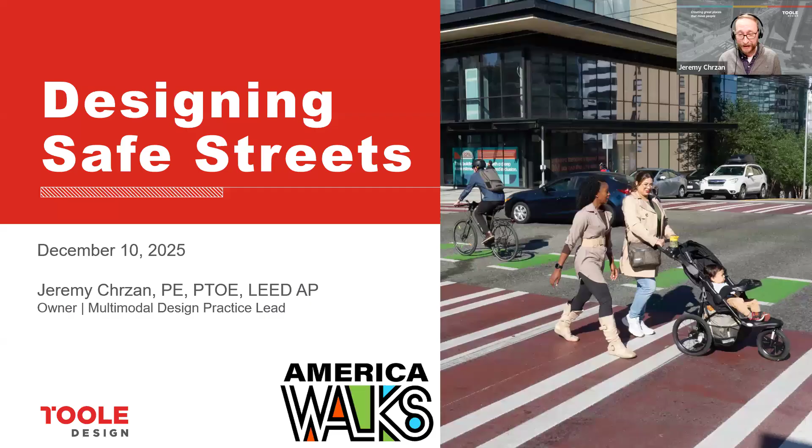In talking with the folks from America Walks, we talked about today's discussion being geared towards designers and designing for safety, but also giving you some of the tools if you're an advocate when discussing streets with your local and regional agencies. So I will say right up front, I'm going to move really quickly through a lot of slides. I'd much rather have a discussion and hear what questions you all have and give you the information that I can towards the end.

So with that, let's dig in. I've been in the transportation industry for over 25 years now, and although funding for streets and safety is actually quite high, the streets really aren't getting safe enough quickly enough. And that really shows in the numbers. Nearly 41,000 people died on our streets in 2023. Just let that sink in for a minute and then realize that millions were injured each year.

We did see some slight reductions in deaths from 2022 to 2023, both for motorists and pedestrians. But at these types of abysmal numbers, it really doesn't make it easy for the thousands of family members who lose a loved one, nor the many millions whose lives are changed due to severe injury.

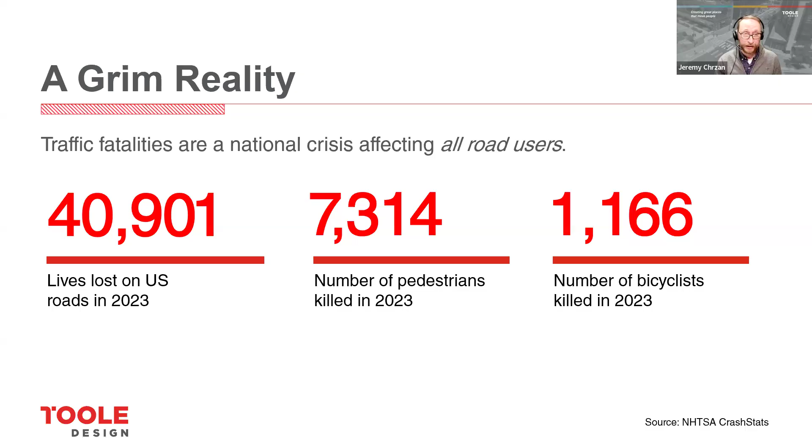And so, in looking at street design and looking at what's working and what's successful around the world, it's clear that a safe system approach to street design is what's needed to genuinely affect safety. And this means improving this culture around the idea of safety. So, from the roadway design side of things, that means safer, slower roads that prevent a person from being killed or injured if a crash does occur. But it also talks about the important parts of improving vehicles and training for everyone that's actually using our roads.

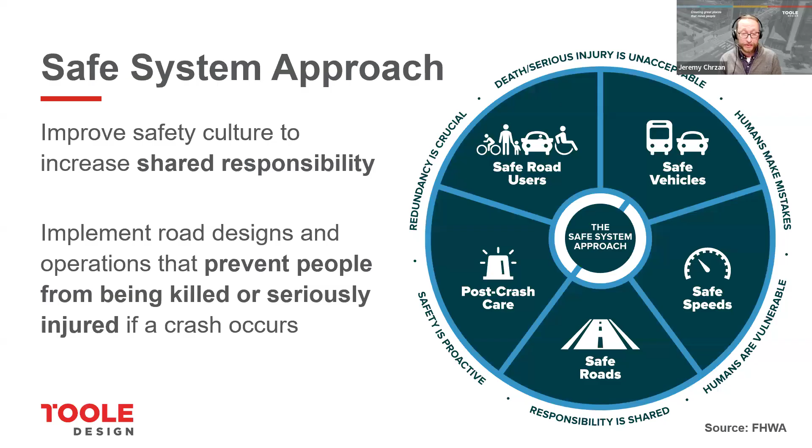Another important takeaway from the safe system approach is that safety needs to be proactive. We shouldn't be waiting to address safety after somebody dies. Yes, we should address existing high crash areas and look at our roads and identify where crashes are likely to occur. But there's lots of places where we probably have close calls and a crash just simply has not happened. And we can identify those things before something happens. So really addressing safety in a proactive way.

So why are we kind of failing at safety in the United States? As I said, vehicles and drivers is one of those things. I'll spend most of my time today talking about the roadway design piece, but I'd be remiss to not talk about the vehicles. This is an area where we've seen an increase in the size of vehicles, which means larger blind spots, more weight. So when a crash does happen, that tends to be a more severe or fatal crash.

And so what can we on the agency side of things do to affect these pieces? Well, one thing we can do is when purchasing the vehicle fleet for those agencies, the DOTs and the city fleets, we can be deliberate about the types of vehicles that we're purchasing. Beyond that, we can also influence what types of vehicles are used on our roadway construction projects.

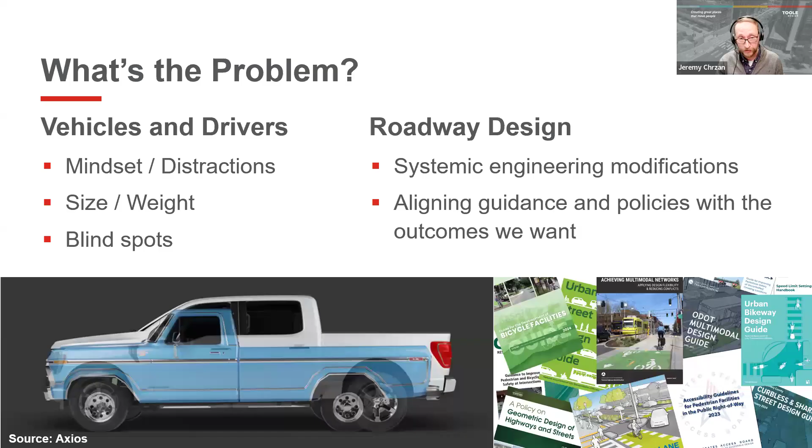So simple things like for larger vehicles, specifying that those vehicles making deliveries or being used on site have to have side guards to reduce the likelihood of a pedestrian or bicyclist being pulled under that vehicle in a collision and seriously or fatally injured. These are things that places like Boston and the surrounding communities are doing and things that can be replicated across the country. So if you're one of those people that has to prepare construction specifications or help identify city policies, you can make a difference when it comes to safer vehicles in that regard.

Moving on to design, it's typical for a designer to cite something called the AASHTO Green Book. That's something engineers use and follow for roadway designs, and is often the thing cited as why we can't do something on a project. But in reality, the AASHTO suite of design guides gives us a lot of design flexibility to tailor a street design to meet our established project goals.

The Green Book is explicit in stating that good highway design involves balancing safety, mobility, and the preservation of scenic, aesthetic, historic, cultural, and environmental resources, and reinforces that sufficient flexibility is permitted to encourage independent designs tailored to the particular situation. Too many engineers use this guide as a detailed manual of standards, even though it explicitly says not to do that. So that's one important thing that we can be doing.

Things discussed in that guide are also open to a lot of interpretation. One of the things that could have a significant effect on safety is the width of our lanes, that many lanes have historically been built in that 11 to 14 foot wide range. Even the old AASHTO bike guides encouraged 14-foot wide lanes with the understanding that it would be more beneficial for vehicular cyclists. That doesn't actually pan out when you look at the research, though, and historically we can identify that narrower lanes tend to actually be safer.

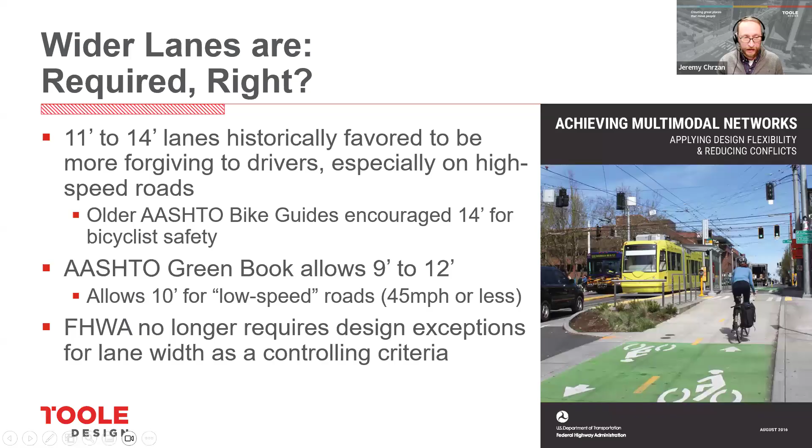It also used to be that you had to jump through a lot more hurdles if you were proposing narrower lanes. But many years ago, FHWA did away with the requirement for a design exception for lanes that didn't meet certain criteria. So we actually do have a lot more flexibility to narrow those lanes, and they're not required to accommodate the widths of vehicles that, by and large, are 7 to 8, 8.5 feet wide for the widest.

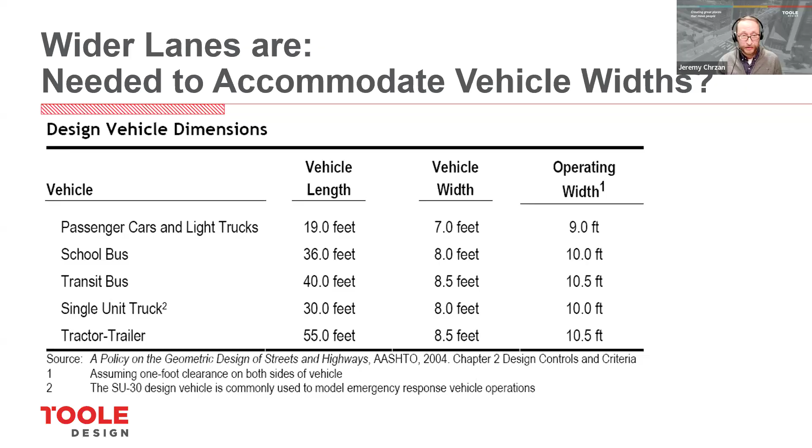And so when you look in the AASHTO Green Book, it talks about the operating width really only needing to be 9 and 10 feet wide. There's plenty of examples around the country where 9, 9.5, 10-foot lanes are used even with heavy transit use. And when we can narrow the widths of lanes, that contributes to lower operating speeds on those vehicles. That's what we know over and over again, that if we can lower the speeds of motor vehicles, we can reduce the severity of crashes if and when they do occur.

And so in FHWA's Achieving Multimodal Networks Guide, we said explicitly that narrow lanes can contribute to lower speeds when they're integrated as part of an urban street design. So it's not just the narrow lanes, it's the other things, but it all adds up to a safer street.

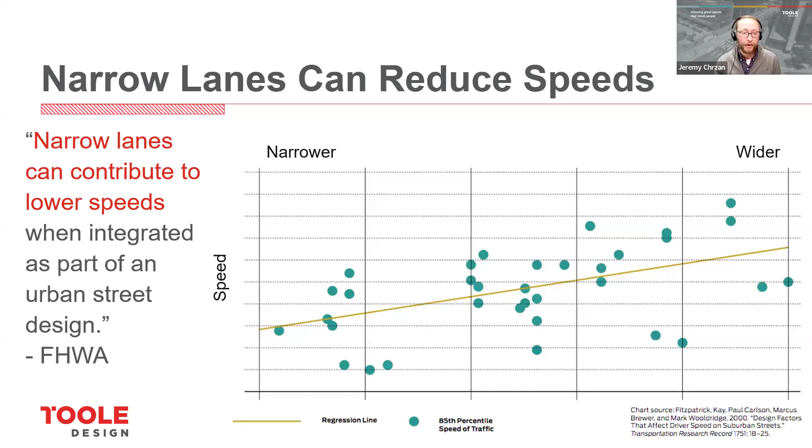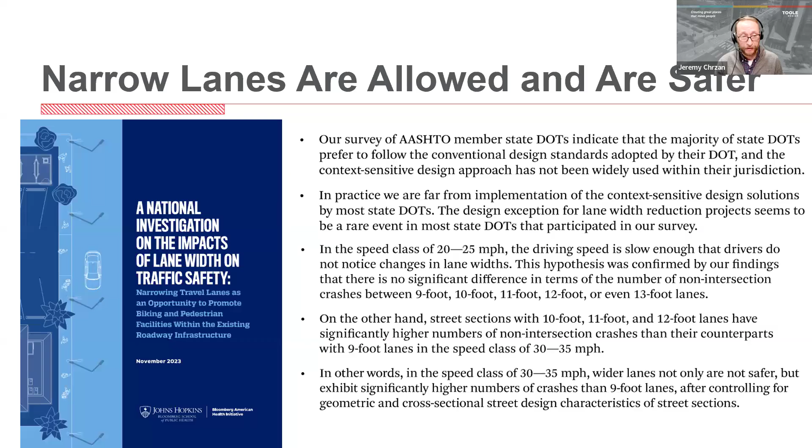One of the reasons that's often cited as a need for wider lanes is for transit or large vehicle operations. But sometimes that information is being taken out of context. Why do we actually need 11 feet to accommodate those wider vehicles? Well, the reason is to try to avoid things like mirror strikes.

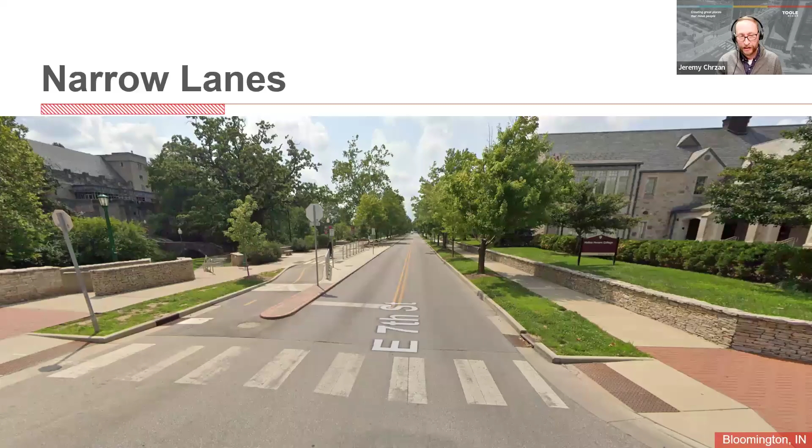But in this situation, on the left-hand side of the road, you can see transit stops there, but there's also a separated bike lane there. So there's a buffer that mirrors can overhang over without striking anything. We don't actually need the 11 feet of paved width, we just need 11 feet of space that isn't going to have obstruction. So really thinking about what was the intent of design guidance can really affect the safety outcomes.

This is another location I drive through all the time. It's East-West Highway in Prince George's County. This is a location where it goes over Sligo Creek, and even though it's an SHA road, it narrows down to narrower lanes, and in this case, 9 feet on the right-hand side.

And I can tell you, having driven through here, every time you go through here, you tend to slow down because it is a little less comfortable to drive quickly. And so it does get some of that driver behavior.

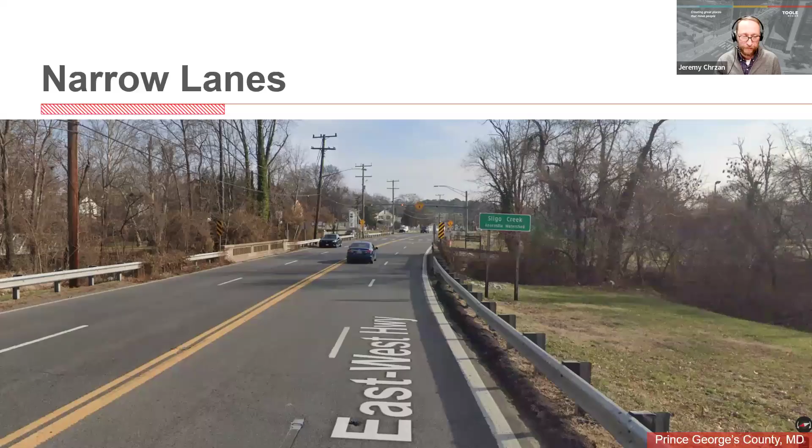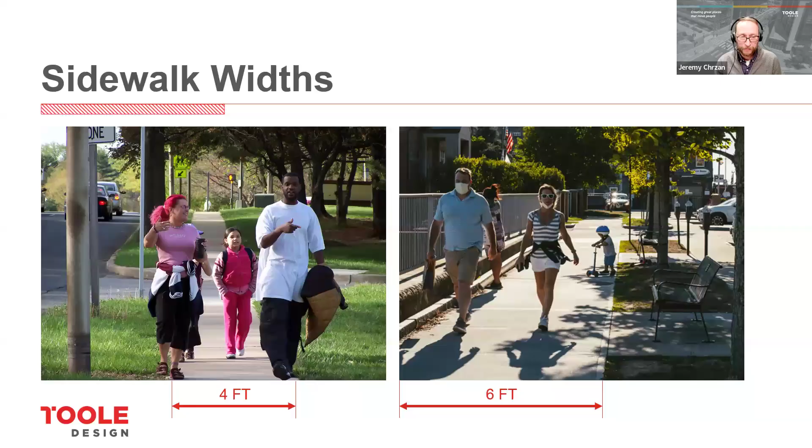Sidewalk widths is also another thing that I think gets overlooked in terms of street safety. Oftentimes, agencies are doing the bare minimum, 4 foot wide with 5 foot passing areas to meet the accessibility criteria. But when we provide 6 feet, it's going to create an environment where people can comfortably walk next to each other. When we have sidewalks right up against the curb, it means people aren't hanging out over the edge of the roadway. And it also makes it safer for children like the one on the right-hand side to be in that space without a safety concern.

As a person with a 7-month-old puppy, I can tell you that my dog is skittish when he hears a truck or a bus. And so I have to deliberately avoid some of the streets in my neighborhood because they're right up against the edge of the curb line and very narrow. The same thing holds true for somebody who's walking with a small child. The widths can inform how safe and comfortable that is.

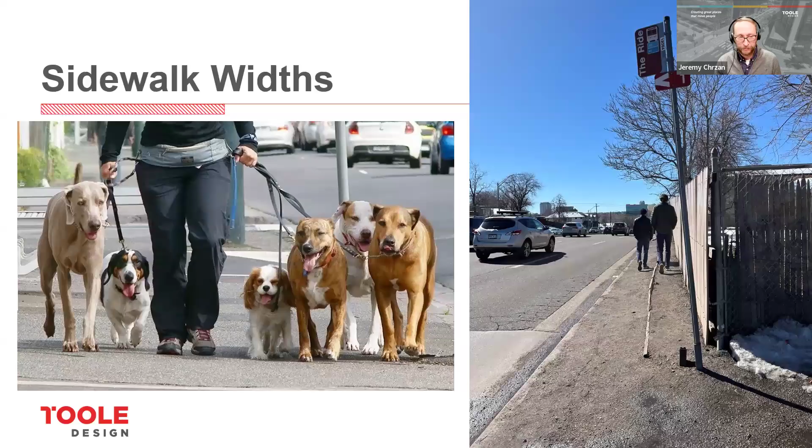Similarly, access to transit, like the photo on the right, the access board does require that accessible routes be provided that connect to transit stops. But beyond that, we also know that we need 8 feet of space to board and alight passengers on a bus. Providing that space also means somebody isn't standing in the middle of the sidewalk and blocking people trying to walk past, avoiding them having to step down into the road to get around people using that space.

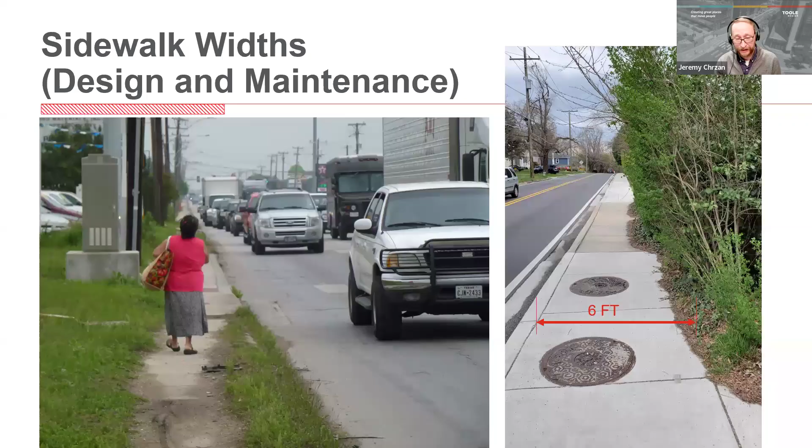And beyond that, maintenance and things like that also are really going to affect safety. Even when you have 6 feet of width, if that's not properly maintained, it's really not going to be safe or comfortable, and people will tend to avoid that location, or if they can't, they end up being put in more compromised situations.

And I'll note that Federal Highway, even back into the early 2000s, was already saying that the desirable width for a sidewalk is often much greater than what's required. In shopping districts, it can require 12, 20, 30, and even 40 feet of width to handle the volumes of pedestrian traffic that they encounter. And it's stated explicitly that sidewalk widths have not been given sufficient attention by most designers.

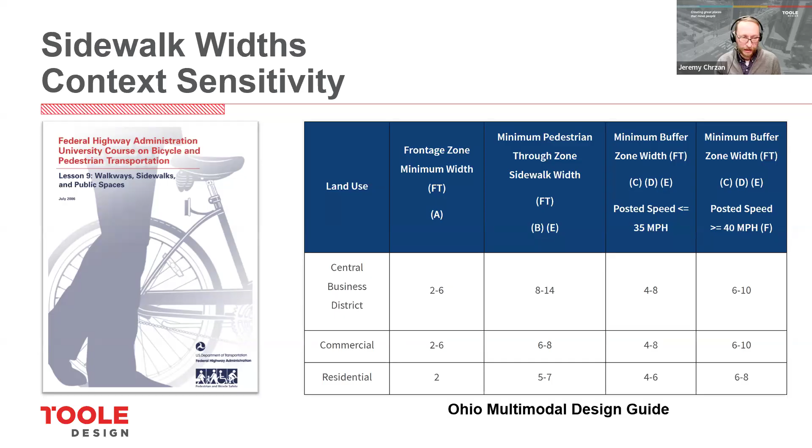So as we were developing the Ohio Multimodal Design Guide, we were looking at not only what are the appropriate starting point widths for a sidewalk based on context, but also what are the appropriate widths of the buffers along those sidewalks to make them more safe and comfortable.

Another thing that's important from a safety perspective is developing public spaces in a more inviting way. The inclusion of things like street furniture, landscaping, and pedestrian scale lighting can make a big difference in making a street more inviting, increasing that pedestrian activity.

When you have that pedestrian activity, drivers are more aware of the fact that they're going to encounter pedestrians on the street. It's that safety in numbers principle that can be applied by making a street more inviting.

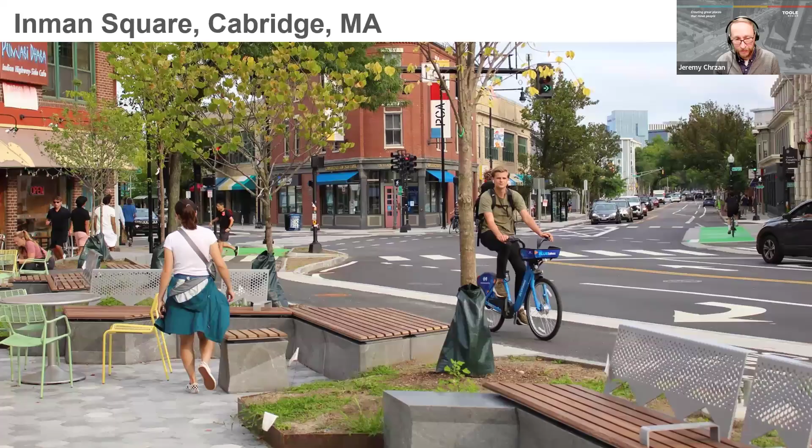This is Inman Square in Cambridge, Mass. This was able to create a space as part of a street reconfiguration that also affected the safety of the street users. Shared use path width, similar to sidewalk width, really needs to be thought through when it comes to the safety of those users on those paths.

Historically, we've been doing shared use paths at the bare minimum 10 feet wide, when at least 11 feet is really needed to accommodate somebody riding side by side and people passing. We know that people flock to these locations to get exercise and socialize. What tends to happen is we build at the bare minimum and get photos like the bottom right, where it's so congested it almost becomes unusable by the wide range of users going at different speeds and volumes. So what the AASHTO Bike Guide points out is that we need to be selecting values for these widths based on the anticipated use.

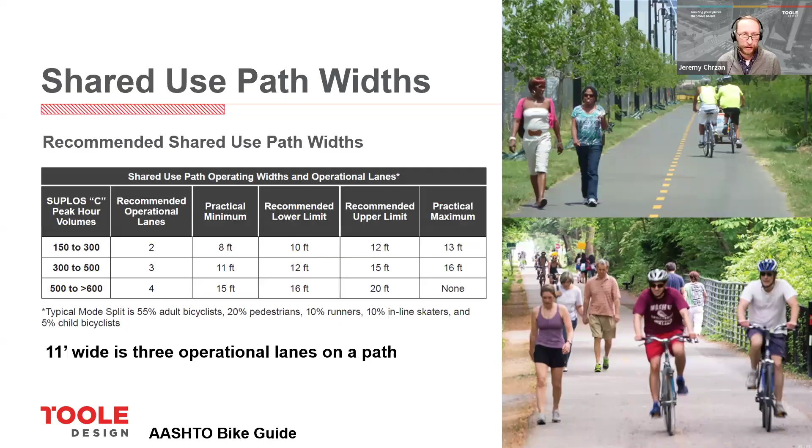Here's an example from Columbus, Ohio, where the widths are clearly wider than what we saw in some of those other photos. It allows people to bike side by side, and would also allow pedestrians to walk side by side, creating a more inviting, comfortable, and safer environment. I also want to point out the importance of shy distances from things along a path. Here, both the guardrail and the railing along the side are offset from the path to make it truly functional.

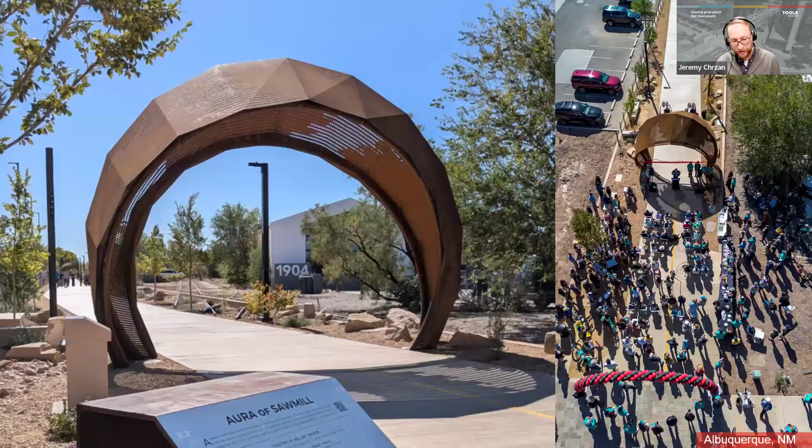Here's another example from Albuquerque, New Mexico, on the Albuquerque Rail Trail. This is a brand new trail, and the default starting width was 14 feet to accommodate that diverse group and variety of different types of users. I'll also note that projects like this that incorporate public art components and latch onto the history of the corridor can help make it more inviting. Pro tip: if you visit Albuquerque and go to this trail, these amazing sculptures over the path each cast a different type of shadow on the path, so look out for that.

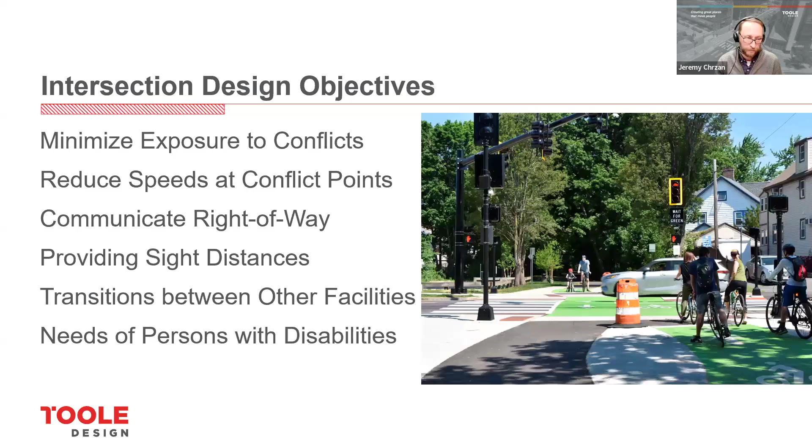Next, let's focus on intersection safety. When we were developing the bike guide, we flagged six things that we need to be doing at intersections, applicable to both pedestrians and bicyclists from a safety perspective: minimizing exposure, reducing the speeds of vehicles at conflict points, communicating who has the right of way, making sure everybody can see one another, and making sure transitions between facilities are intuitive and that the needs of people with disabilities are being addressed.

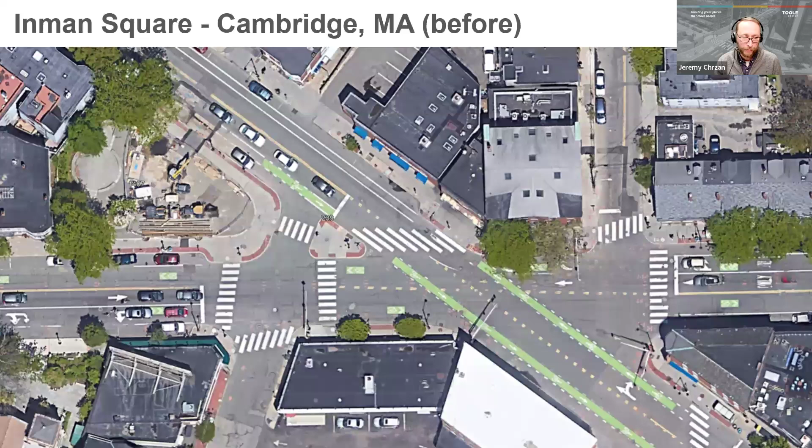Here's what that street looks like today. You can see that plaza I talked about before in the upper left. We were able to repurpose a lot of public space and focus the design on safety, making it more intuitive and reducing those pedestrian crossing distances, and where we had to, relying on things like signalization to separate motor vehicles from pedestrian and bicyclist traffic.

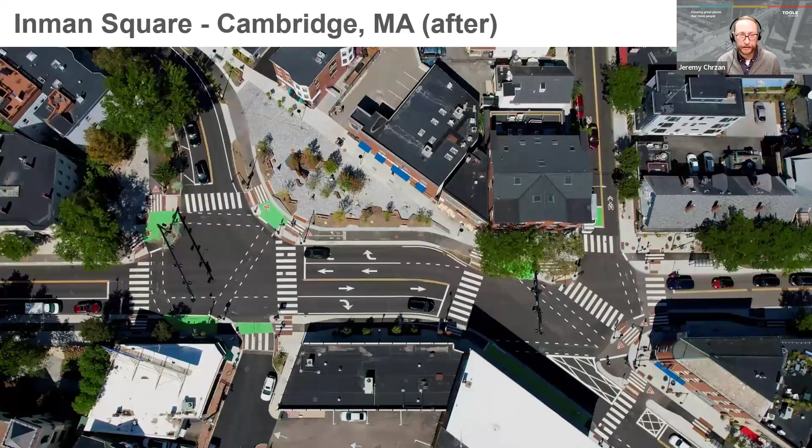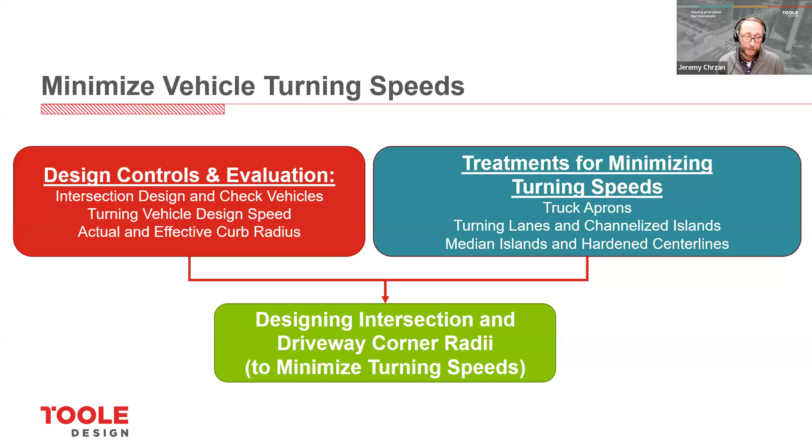When we talk about minimizing vehicle speeds, that's really important on our streets. We need to focus on what vehicles we actually need to use as our design vehicle, and what vehicles we simply have to accommodate, then alter the design to meet those needs. One important thing to recognize is that when you construct a corner at an intersection, the constructed radius is not always the path that the motor vehicle actually takes.

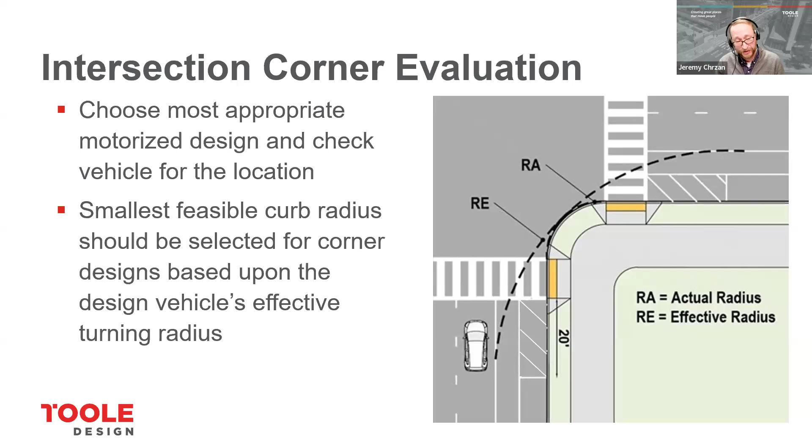More often than not, like the photo on the right here, the effective turning radius, which is what's going to control the speed, is often much larger than the constructed radius. So curb extensions can help with that, and protected intersections can further help with that. We'll talk about that in a minute.

But first, what are the appropriate vehicles that we need to be accommodating on those streets? Too often, I'm told on a project that we have to accommodate the large tractor trailer at each one of these intersections. Is that actually true? Is that the vehicle that's frequently making that maneuver, or is it something that's really only occasionally happening and really doesn't need to be the design vehicle for that location?

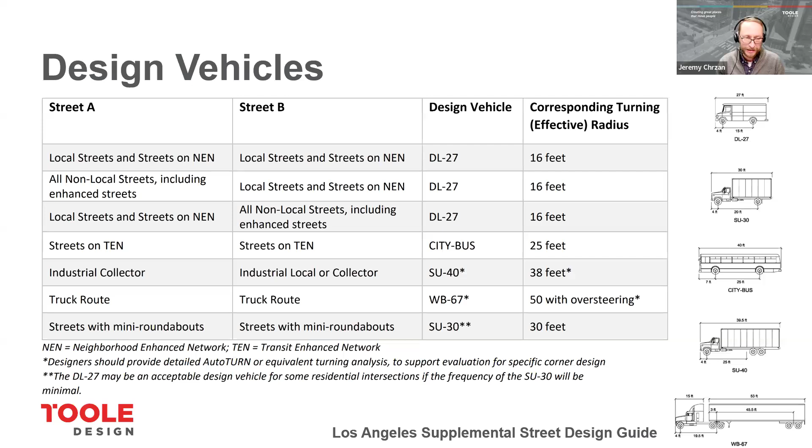The Los Angeles Supplemental Street Design Guide is a good example of highlighting that if it's local streets, it's by and large the Amazon truck or the FedEx truck. Those are the most frequent larger vehicles using those streets. Yes, we still need to accommodate the trash truck once a week and those occasional large vehicles, but as long as we have the pavement for that to work, it'd be much better to design it for those smaller vehicles as the default user.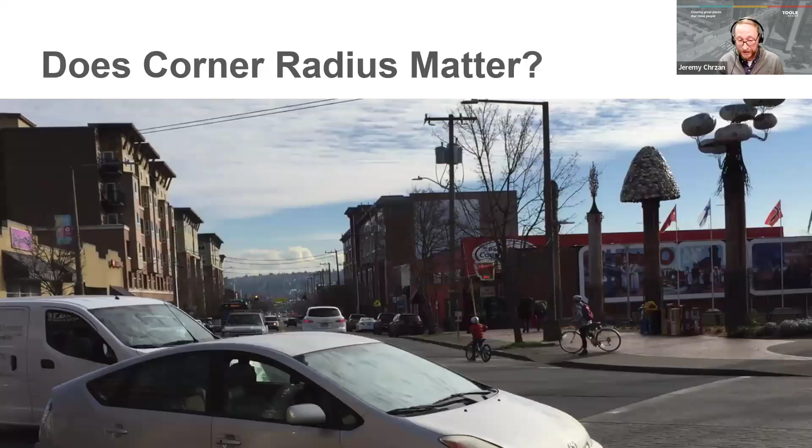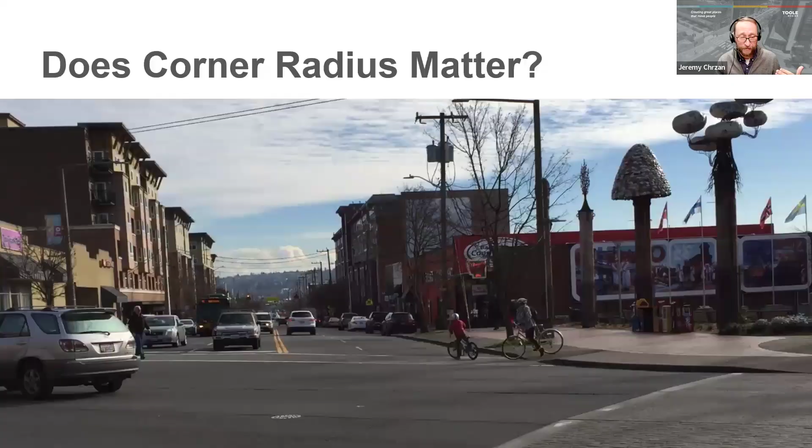Does the corner radius actually matter? I could tell you this mother and her child, it very much mattered. This is a location that has a large constructed radius, and because we have two receiving lanes on that intersecting street, that white vehicle was able to make that turn quite quickly. Everybody can see that the conflict is happening, but the vehicle's traveling too fast to be able to react.

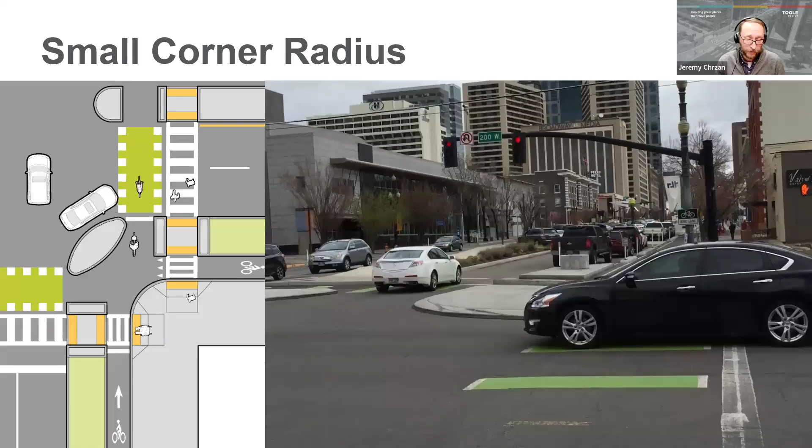By comparison, an intersection that's designed with a small corner radius forces a turning vehicle to make that turn more slowly. These are effective strategies at addressing safety and should be deployed more frequently on each and every one of our intersections. And it doesn't have to always be in concrete.

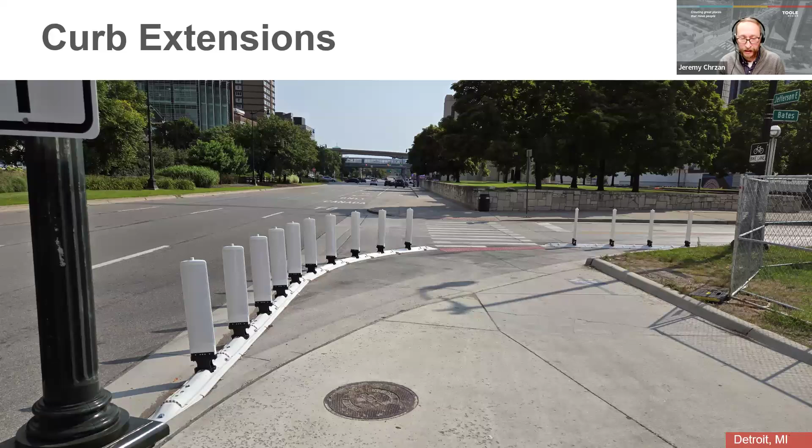We can retrofit our streets to meet these needs today. This is a good example from Detroit, Michigan that I encountered, where a sort of quick build curb extension was used to tighten up that location and force drivers to make that turn a little more slowly.

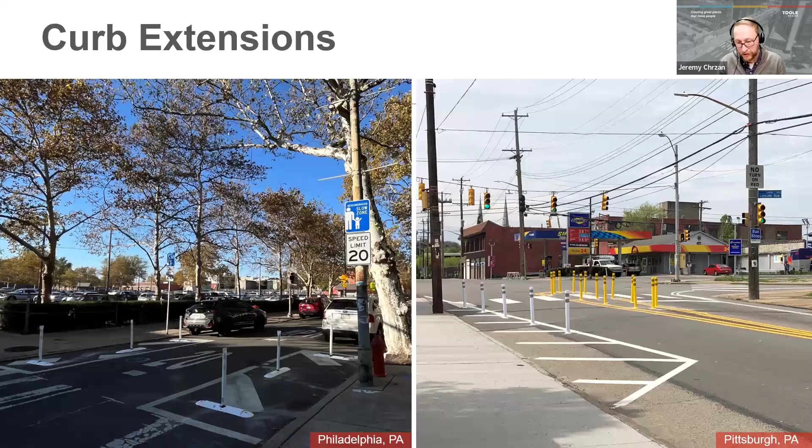We're seeing this across the country. The Philadelphia Slow Zones Initiative is using bump out curb extensions to alter the corner radii. Here in Pittsburgh, that was another example of not only doing some lane narrowing and some corner changes, but also doing some chicaning to affect motor vehicle speeds on those corridors.

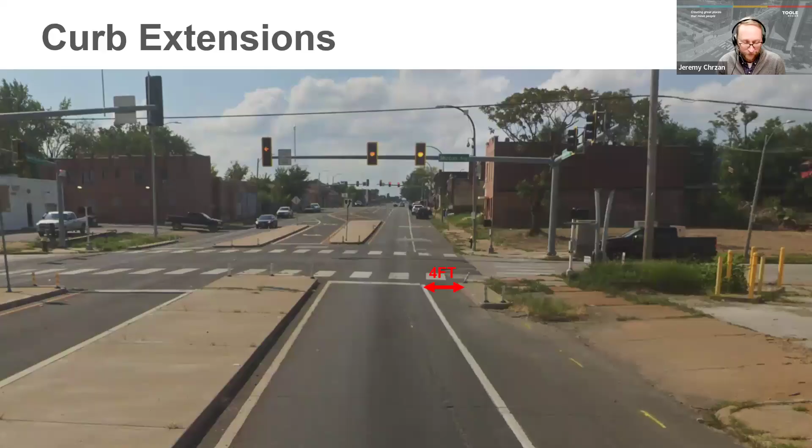But not all curb extensions are built alike. In this example here that I recently encountered, there was a safety project that was done. They installed lots of concrete in the middle of the street, but the curb extension on the right there has a 4-foot offset from the adjacent travel lane. It's minimally effective at addressing turning vehicle speeds and doesn't provide the benefits of things like shorter crossing distances for pedestrians. So it's not affecting the pedestrian exposure or the turning vehicles.

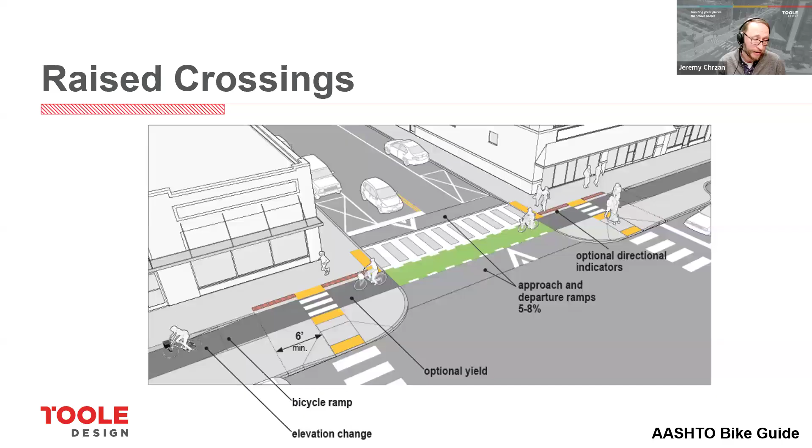Raised crossings are another one of those treatments that can control vehicle speeds. We can deploy these things not just at intersections, but also at driveways to further reinforce that the crossing users have the priority while still accommodating the motor vehicles at those locations.

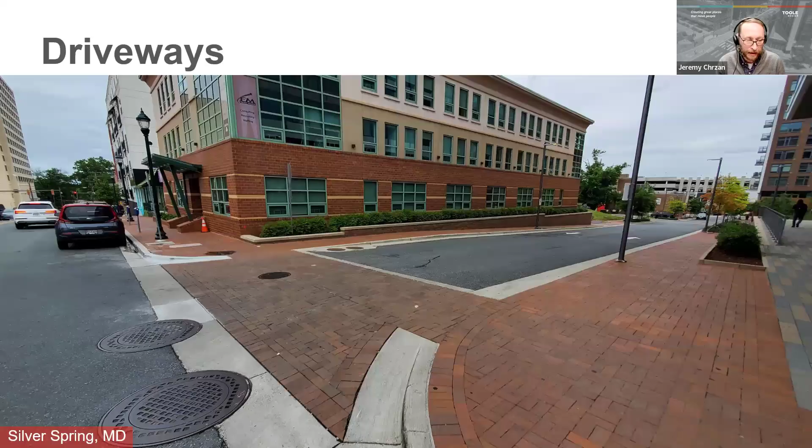Here's an example from Silver Spring, Maryland, where you can see the priority is maintaining the pedestrian traffic while still accommodating the vehicles turning there.

And we're not seeing vehicles bottoming out with these types of designs because we're incrementally stepping up that elevation. So really it comes back to altering the design guidance to a design that actually works and has been tested like this.

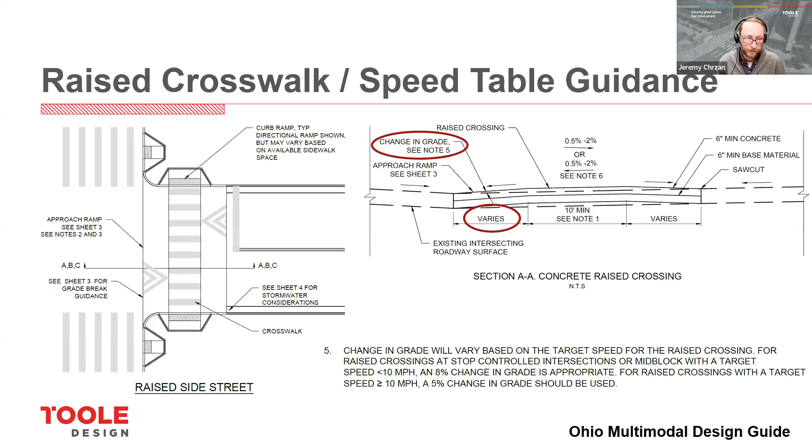Another example from the Ohio Multimodal Design Guide is their detail for raised crossings and speed tables, which drives home a point that past traffic calming guidance missed. It always said that the ramp up and ramp down on these treatments needed to be 6 feet long, but that just means a static change in grade. What we highlighted in the multimodal design guide was that you should alter the length of that ramp and the change in grade based on what speed you want drivers to navigate it at.

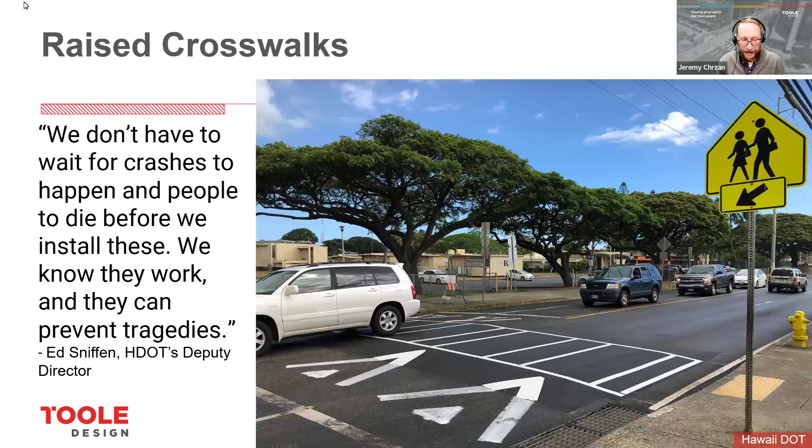We're seeing lots of agencies doing this as a default policy now. The state of Hawaii is doing tons of raised crossings to address safety. As they said, they don't have to wait for crashes to happen, because they know this is a strategy that works, so they're deploying them regularly.

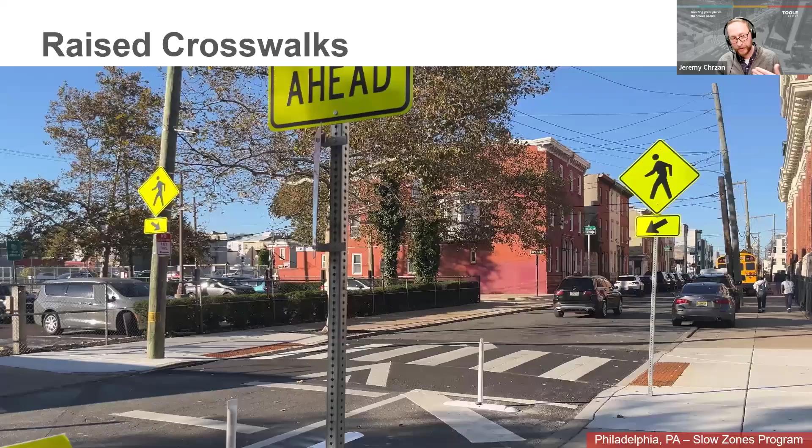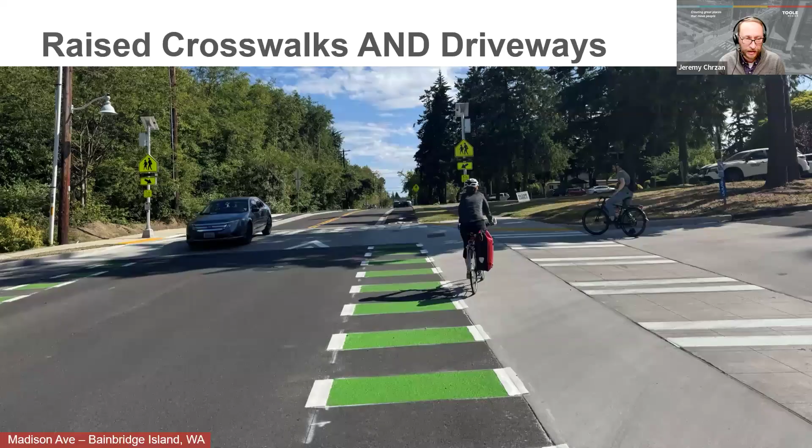Here's another example from the Philadelphia Slow Zones program. As you build these, it really empowers the agencies to know these are things they can do and that they work. Here's another example from Bainbridge Island, Washington, which includes both a raised crossing across the main road and a raised crossing across the adjacent driveway. This is important because in this context, it's next to an elementary school and a middle school, and also serves as a connection to the Sound to Olympics Trail as well as some park trails. So this is a location with vulnerable road users, and installing infrastructure to address that is part of the conversation.

While there are lots of tools we can use to affect driver behavior and speed, like curb extensions, medians, and pedestrian refuges, the one I find most compelling is probably mountable truck aprons. Anytime I'm doing an intersection corner that's more than 15 or 18-foot radius, I want to see a mountable truck apron to control those turning vehicle speeds.

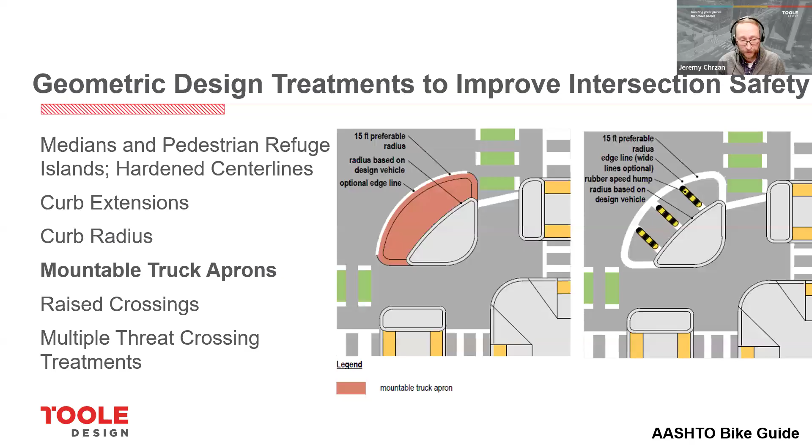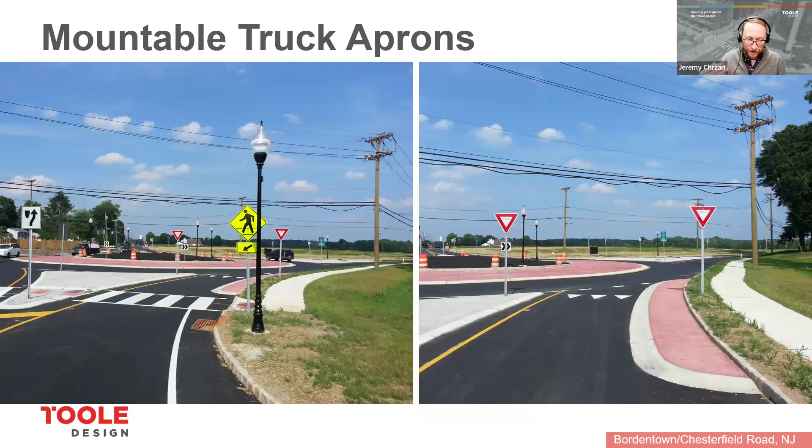The first roundabout I ever worked on was this one in Bordentown, Chesterfield Road in New Jersey, implemented as part of a safety project. Even though we had to accommodate larger vehicles, we incorporated mountable aprons on the approaches to these roundabouts to control entering vehicular speeds. Note also the picture on the left - that mountable apron is only included on the downstream side past the crosswalk, because we deliberately didn't want to confuse pedestrians into thinking the area in line with the apron was a safe place to wait. So some designs you'll see it upstream of the crosswalk, others downstream - it just matters where it's going to be most effective at controlling speeds.

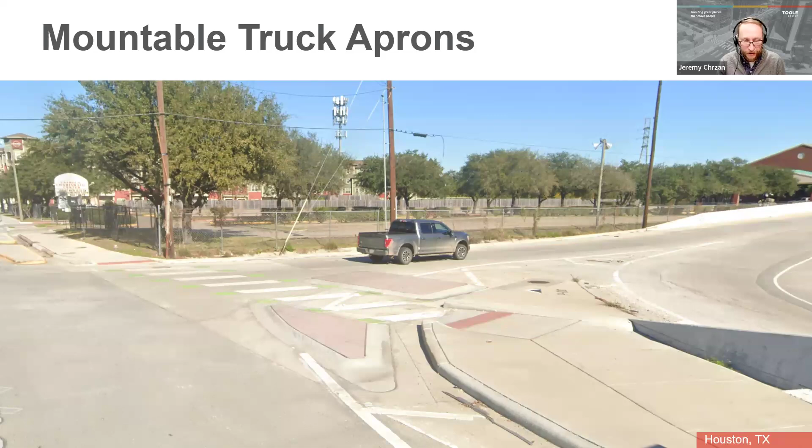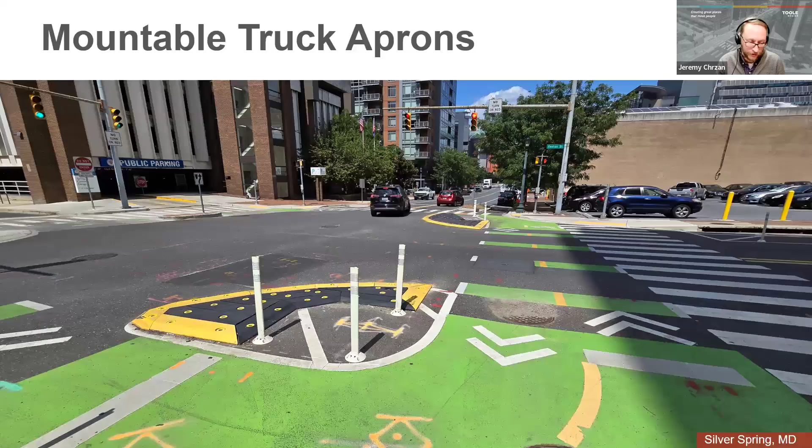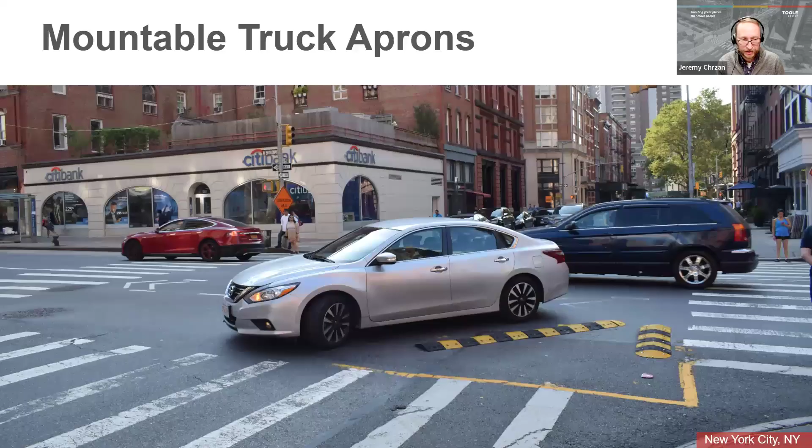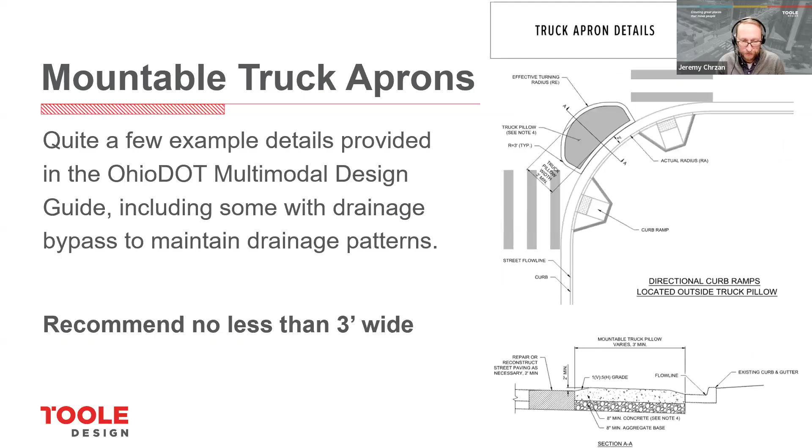There's a lot of good construction details - if your agency doesn't have them, we included those in the Ohio Multimodal Design Guide, showing this configuration as well as the one we referred to as a truck pillow.

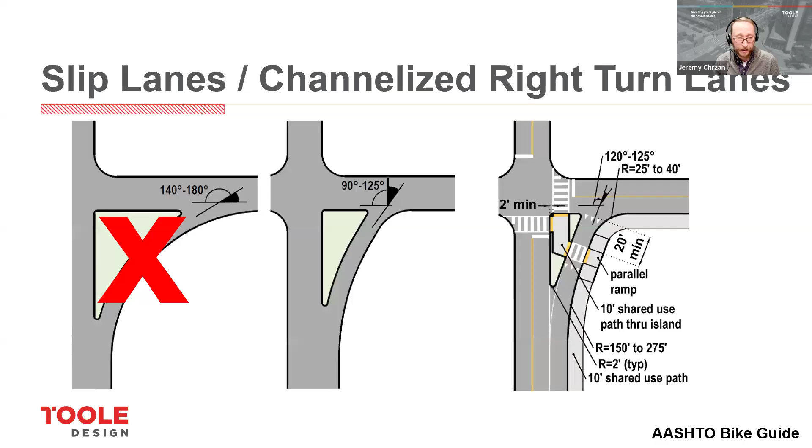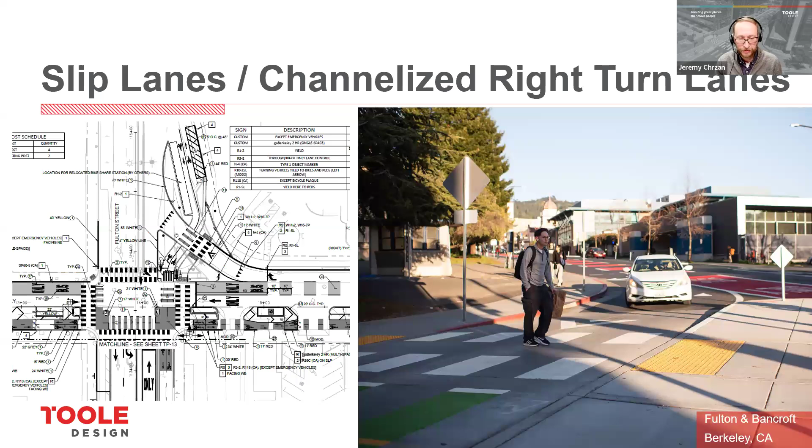So the Fulton and Bancroft intersection in the Berkeley, California project included that type of geometry, and it includes both pedestrian and bicyclist crossings of those slip lanes.

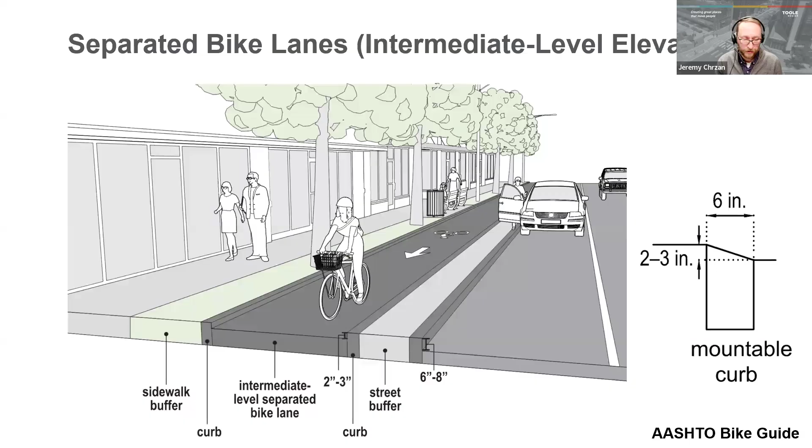Intermediate level separated bike lanes are also a great tool for addressing safety, as well as pedestrian accessibility. If we include a small mountable curb between the bikeway and the adjacent sidewalk, it can really help reinforce the difference between those two facilities and not encourage pedestrians to walk into those locations. Austin, Texas is deploying those regularly. These intermediate level designs also make it pretty easy to do grading at things like floating bus stops, making that transit accommodation a little better for pedestrians.

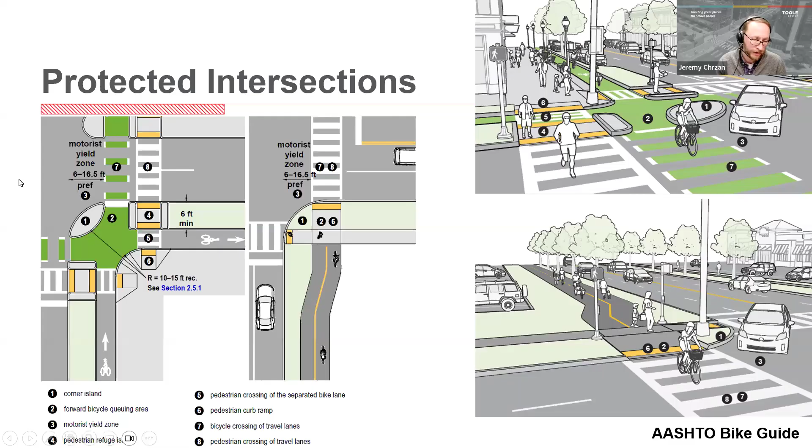Protected intersections are a clear concept that works well not just for separated bike lanes, but also shared use paths along roadways. The key features are the corner island that slows the turning vehicle and having an offset from the adjacent roadway. Research has shown that an offset of 6 to 16 and a half feet from the adjacent roadway is more likely to get that motorist yielding.

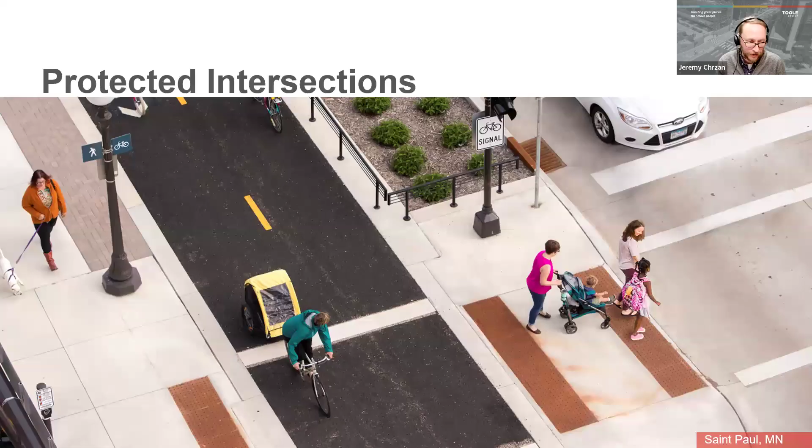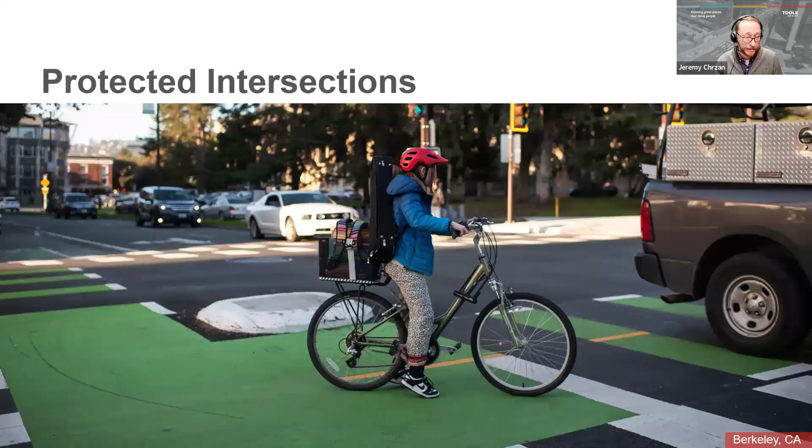The first one I ever worked on was St. Paul, Minnesota, but there have been plenty constructed around the country. Here's another one from Berkeley, California. The Berkeley project included a protected intersection. You can see here it's not even a very large corner island that's needed, but it is effective at controlling the speeds.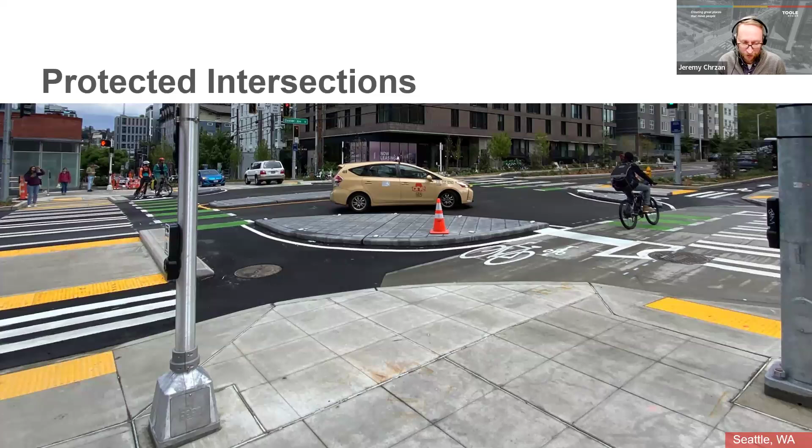Seattle, Washington has quite a few of the really good designs for protected intersections. Here it's even doing a center median in the middle of the road to really narrow the roadway widths and make the vehicular turning paths more predictable.

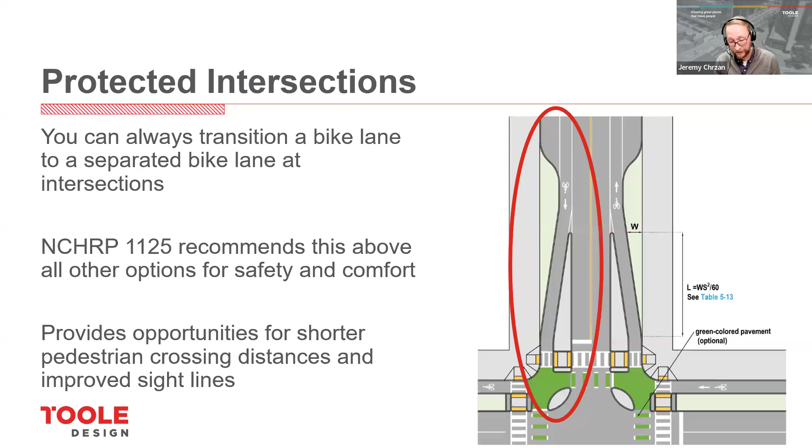You don't just need to do this if you have a separated bike lane. You can convert conventional bike lanes to a separated bike lane at an intersection, and that's actually the preferred recommendation from NCHRP 1125, highlighting that that's the preferred design for both safety and comfort.

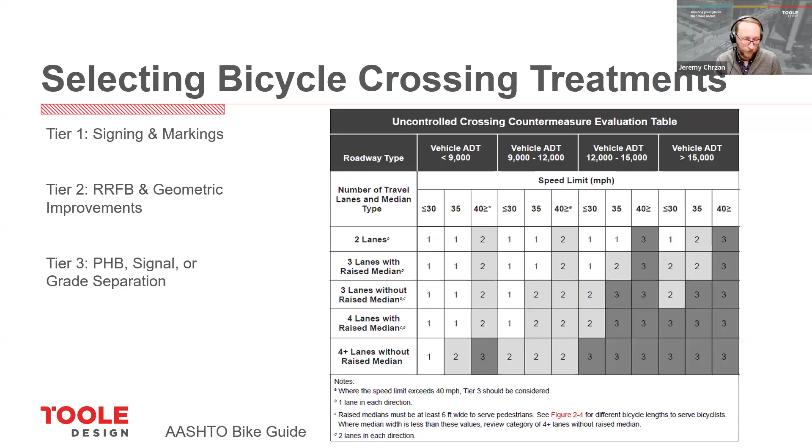Obviously, we have the FHWA STEP guide to identify what countermeasures work well for a mid-block crossing, and you'll see similar guidance in the AASHTO bike guide, focusing on markings, rapid flashing beacons, pedestrian hybrid beacons, and signalization.

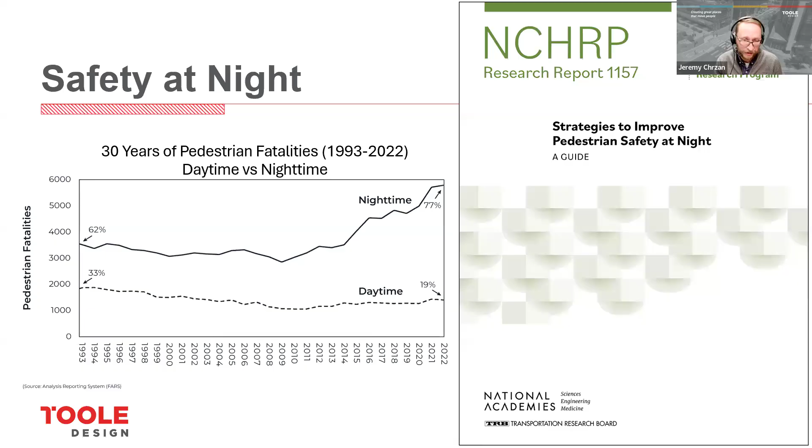Safety at night needs to be a major focus of our infrastructure investment because nighttime crashes are where we're seeing the greatest number of pedestrian fatalities. That was highlighted in the recently released NCHRP 1157. That study identified that the key to addressing safety at night is reducing vehicular speeds, enhancing visibility, and reducing a pedestrian's exposure within the roadway.

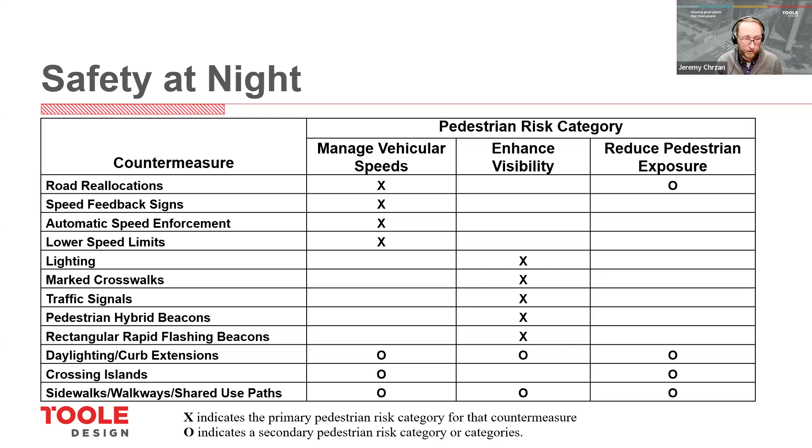So what are the countermeasures that work well for that? The top ones are reallocation, speed limit setting, and enforcement, because that's what's going to ultimately affect vehicular speeds. Yes, lighting and other treatments are still part of the equation, but we have to alter the speeds to really get those safety benefits.

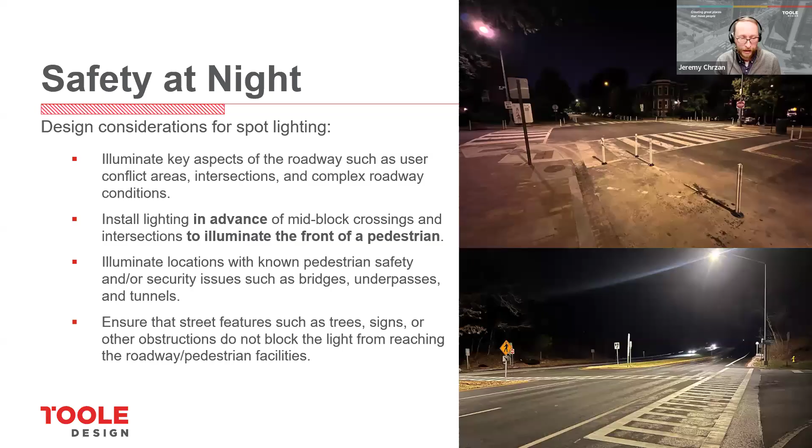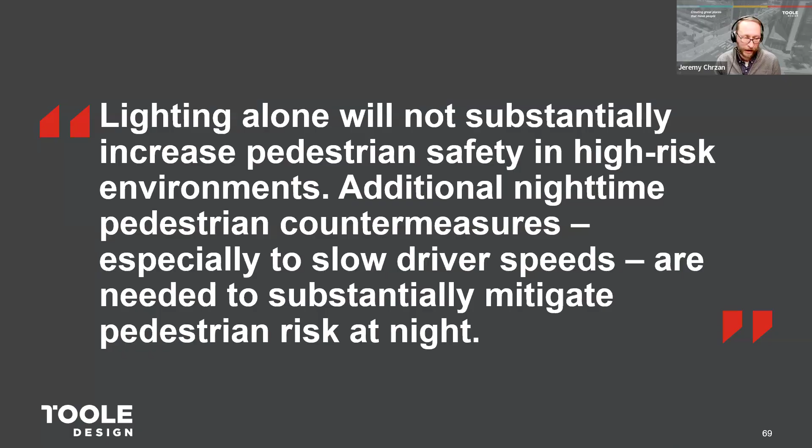When it comes to lighting, specifically located spotlighting—particularly locating them in advance of a crossing so a pedestrian is front illuminated—is most likely to be the most successful. But the study was very clear: lighting alone will not increase pedestrian safety substantially. Instead, we need to alter the speeds of vehicles to have a significant impact on pedestrian safety at night.

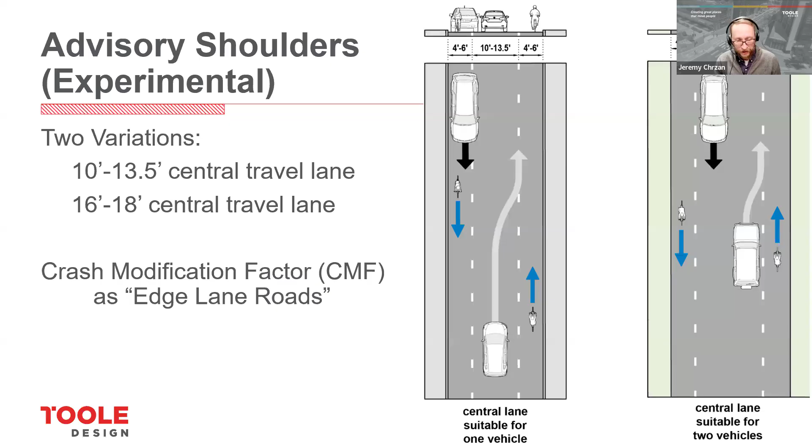Closing out here, I don't want to miss rural areas and rural safety for pedestrians. One treatment that's quite interesting is advisory shoulders. They are technically experimental, so you need a request to experiment from Federal Highway if deploying them. But that said, they do have a crash modification factor and have been shown to better address safety on those types of roadways. You can look that up under the title Edge Lane Roads.

And again, these aren't pie in the sky ideas. They are being implemented around the country. This is an example from Maine as well as New Hampshire.

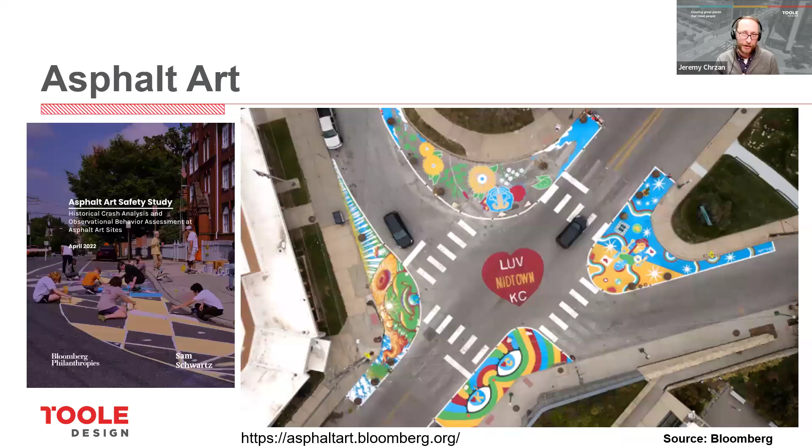I'll close out with something that's a little less physical in nature. Despite what you may have heard, aesthetic surface treatments are still permitted by the Manual on Uniform Traffic Control Devices. In situations like what's shown here, those areas outside of the edge lines aren't actually part of the street anymore—they're part of the sidewalk. So we have a lot of flexibility we can deploy there.

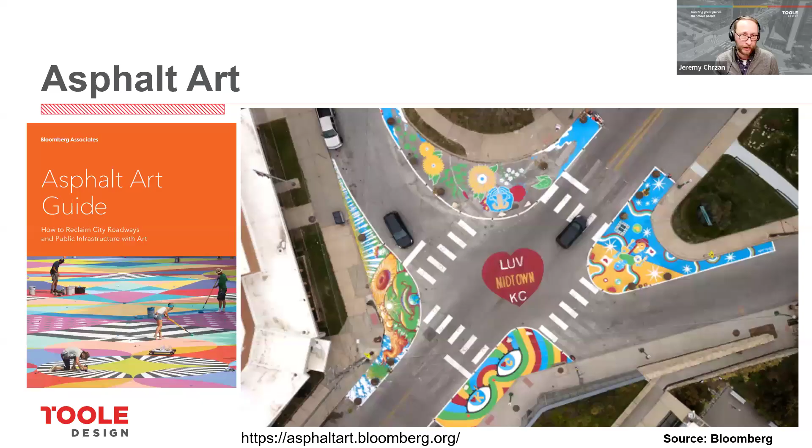The Bloomberg study that was done in 2022 looked at both crash statistics as well as user behavior, and found that these types of treatments can have a benefit in reducing crashes and improving motorist yield rates.

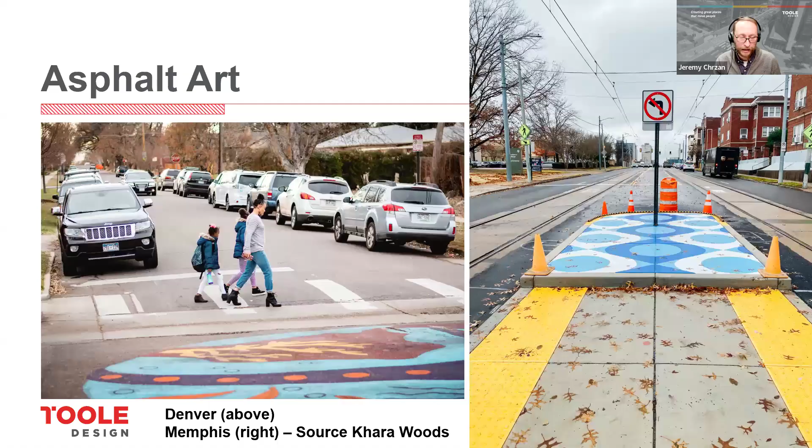On the left, there's an older example from Denver, and on the right is a newer example from Memphis, where those markings were installed outside of pedestrian areas to help make it easier for people with vision disabilities to navigate those locations.

Honestly, there was a lot of content I could have presented. I could have touched on hardened center lines and refuge medians, speed setting policies, roundabouts, accessible shared streets, curbless and flush streets, as well as other traffic calming elements and signalization strategies. But I'd rather hear what you all want to talk about. So thanks for listening, let's dig into your questions.

Thank you, Jeremy, that was great. I've been following along with the Q&A in the chat—there's a ton of questions. People love digging into the details of street design. There's something about that which really gets some people, including dedicated amateurs like me, as opposed to professionals like you.

The first thing I want to say, using my prerogative here: thank you for bringing up safer vehicles. I'd urge people to look at our safer vehicles campaigns we're working on. One thing we've been advocating is that city and state governments purchase safer vehicles for themselves and require in their contracts that contractors use safer vehicles too. There's a lot that can be done there.

One of the other questions was about how you deal with a traffic engineer citing either the Manual on Uniform Traffic Control Devices or the AASHTO Green Book, who says you can't do something different. I think one takeaway from this presentation is that pointing to other people doing it is one answer, along with following those guidelines. But I'll throw it to you—what do you do when someone says you can't do that, or when an engineer has already decided he doesn't like what you're doing and uses the manual as a defense?